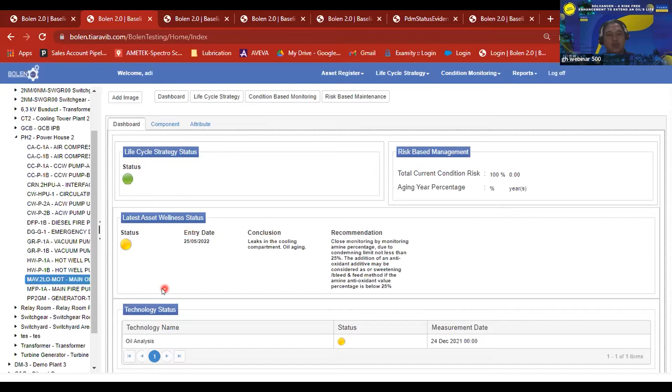Untuk detailnya, di feature Bolen sendiri kita bisa melihat kondisi dari equipment yang kita pilih. Di sini contohnya ada equipmentnya main oil tank. Secara overall ingin mengetahui secara status apakah merah, kuning, hijau, warning atau danger. Kemudian teknologi yang digunakan untuk memonitor aset tersebut. Di sini contohnya adalah oil analysis.

Untuk kemudian dari maintenance strategi, kemudian dari failure mode effect analysis, kita bisa inputkan juga apa-apa yang perlu dilakukan, apakah dari mulai functional failure-nya, kemudian failure effect-nya, dan failure cost-nya, untuk membantu kita menentukan maintenance strategi yang paling tepat.

Selain itu, spesifik terkait dengan equipment-nya, itu juga kita bisa mengetahui secara web base yang mana dengan menunjangnya industri 4.0, yang sifatnya software ini web base, itu bisa mengetahui kondisi dari teknologi status, kemudian measurement point, misalnya di sini ada viscosity, acid number, kemudian RULER maupun MPC atau varnish.

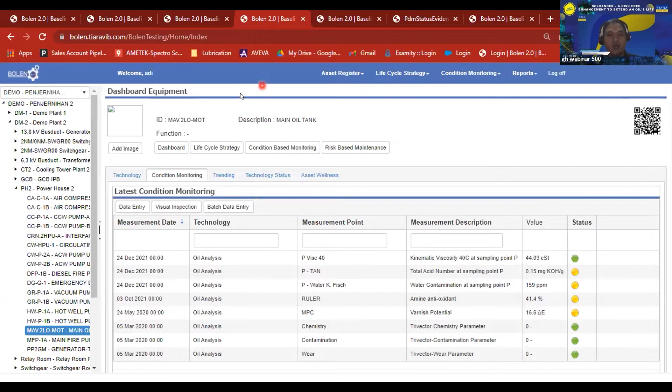Kemudian dari secara overall teknologi status di sini contohnya ini merupakan account demo, statusnya kuning. Kita bisa melihat examination-nya apakah kita menggunakan metode FDCAR, finding, diagnosa, analisis, conclusion, dan recommendation, untuk bisa direview oleh analis apakah rekomendasi yang sudah diberikan oleh teknologi spesialis itu sesuai dengan kondisi yang ada di equipment di masing-masing site atau di pabriknya.

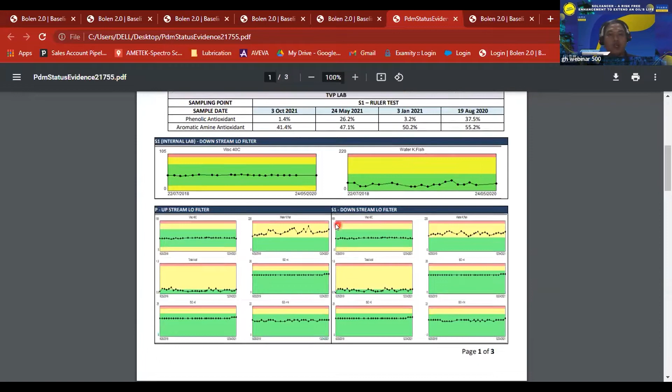Untuk kemudian bisa kita lihat juga untuk evidence secara detail maupun trending dengan cara mengupload kemudian mendownload report yang lebih spesifik untuk nantinya apabila equipment tersebut terdiri dari berbagai macam teknologi, itu bisa ditentukan secara aset wellness-nya statusnya hijau atau kuning atau bahkan merah, untuk kita review kembali statusnya dan finding, diagnosa, analisis, conclusion, dan rekomendasinya secara level aset apakah memang sudah sesuai atau tidak.

Nah, itu sedikit gambaran tentang software Bolen yang Tiara sendiri develop. Mudah-mudahan secara singkat ini bisa meng-capture dan memberi tambahan informasi apakah bisa diterapkan di site atau di pabrik yang Bapak miliki sekarang ini. Baik, dari saya cukup.

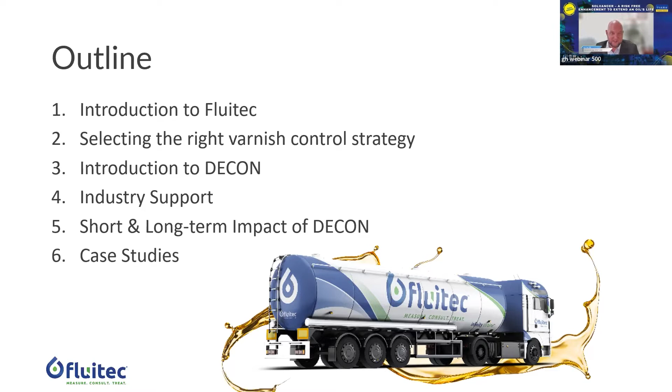First of all, a little explanation about Fluitec.

Our name says it already. We're a company that's in the fluid technology business, and the words below our logo summarize our mission. We have a holistic approach: we like to measure, we like to consult, and we like to treat, to make sure we have a full scope that we can deliver to the customer.

Our corporate seat is based in the Netherlands, that's our HQ. However, our main operations and R&D center are in New Jersey, USA, which is also a major global logistical hub. For Asia, we are in another major logistical hub, Singapore, that's our Asian headquarters and where I am based. From there, we deliver to the region and work locally with agents such as PT Tiara in Indonesia. We also have a local joint venture with some production capacity in Melbourne, Australia, so we're nicely suited to tailor to the market.

So what is it that we do? There are some aspects to this. First, the measuring aspect means our roots are in condition monitoring. We started out as the inventor of the RULER test, our own invention, patented by Fluitec. We also co-developed the MPC, which is one of the major standards today by OEMs and oil suppliers as a varnish potential condition monitoring method. These are our two essential parameters, now recommended by most OEMs as a standard oil analysis slate. So that's the measuring part.

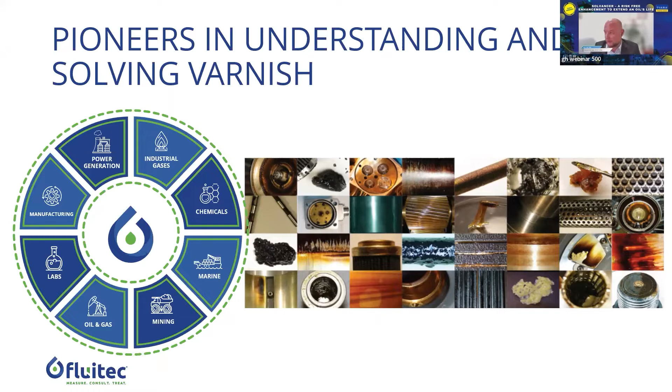We have two main solutions for that. We have an addition, or enhancement, to the oil known as Solvancer, which is the main topic for today. But we also have specialized filtration known as Vita ESP to remove varnish from the oil, because varnish cannot be removed by normal depth media filtration.

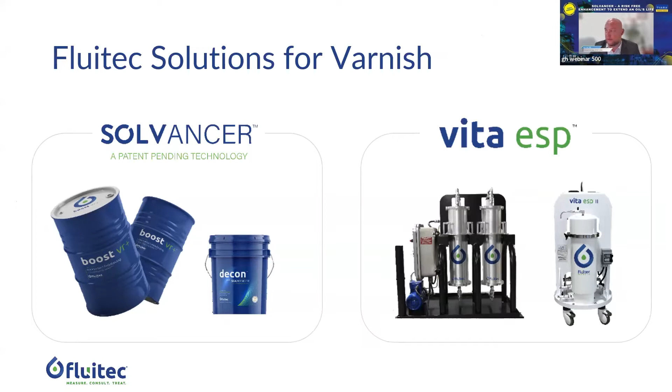Our total product line consists of 4 main products. For us, it starts with knowledge sharing, because we want to educate the market. We want people to know what varnish is, and how they can be more sustainable, more efficient, extend the life of their oil, and so on. So we developed a platform for that called Fluid Learning, where we give webinars such as this and publish it to the market and to interested people. Do take a look at Fluid Learning if you get a chance. Then we have condition monitoring, as briefly discussed, our RULER and MPC. Contamination control stands for the specialized filtration systems we have. And for today, the main topic is the Solvancer product.

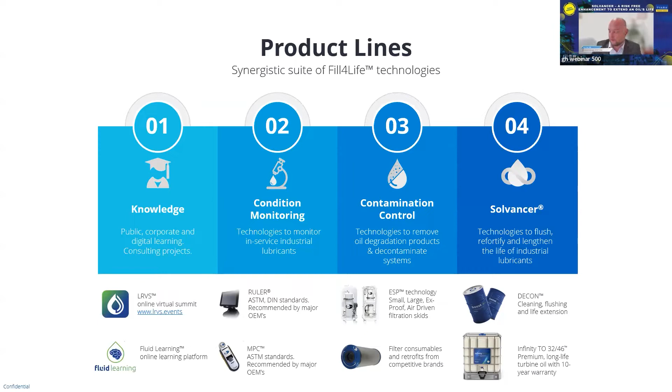Our customers are spread over various industries, consisting of major petrochemical and oil producers, but also OEMs such as Siemens Energy, air separation companies, shipping lines such as Maersk, and of course major oil companies like Shell are our customers as well. So we span across many different industry sectors and geographies.

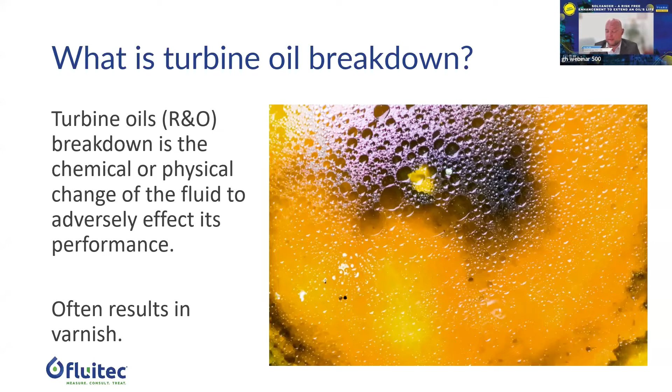So first of all, we need to look at what is oil breakdown, specifically in this case turbine oils, R&O. The breakdown means the chemical or physical change of the fluid, which will inhibit its performance, having a negative impact. This often results in the formation of varnish, which is the sticky layer that forms on metal surfaces.

What do we mean by that exactly? Varnish is basically a deposit that's on the metal, but it's made up of various chemistries. This depends on the operating conditions, the chemistry of the fluid, and contamination that might be happening in the lubricant. But what varnish is, is an oil-derived deposit. It usually comes from within the oil itself, and it's a chemical reaction.

For example, depleted antioxidant additives can start to form varnish. Because it's an oil-derived deposit, it comprises soft and soluble organic compounds. Because they are soft and soluble, they pass through depth media filtration, they pass through your filter membranes, and they are not able to be filtered out by normal filtration. This is the reason why we need specialized methods to combat this issue and help prevent varnish from forming. That's the background of this.

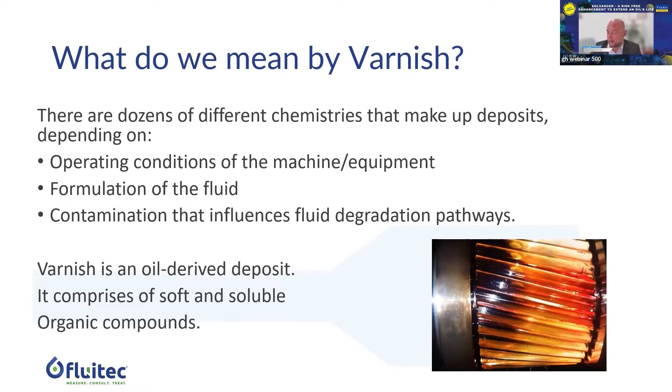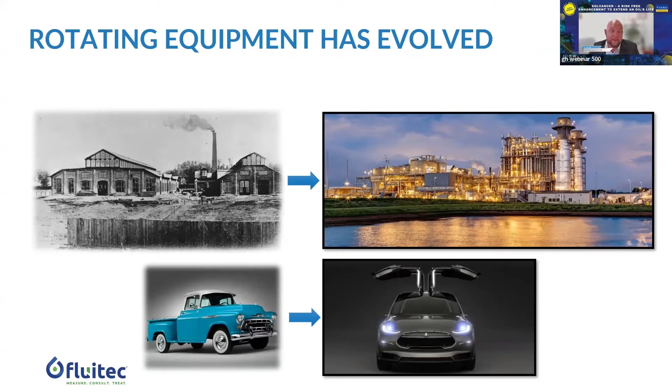Some examples: changing operating conditions in power plants, higher base load, cycling on and off of turbines in some cases when there's a base load issue. That all adds stress onto the oil. Lubricants today may also have multiple purposes, and the formulations of lubricants have changed to cope with this.

New formulations of lubricants have generally resulted in higher performing oils, but also need more care. They need to be monitored and maintained differently, and they need some extra love and care to work properly and to prevent deposit buildup in your system.

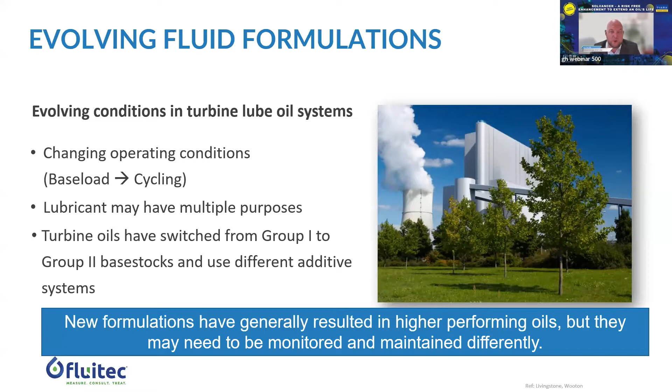If we look at the evolution of lubricants and the way they are being operated, we see that the stress on oils has increased, generally speaking, by 400%. This does not come from us, but from the OEMs—they have concluded this. You can imagine the thermal stresses on the oil are greatly increasing the way it degrades and decomposes. This all adds to the varnish issues we see in the market, reducing the lifetime of the oil and also the equipment.

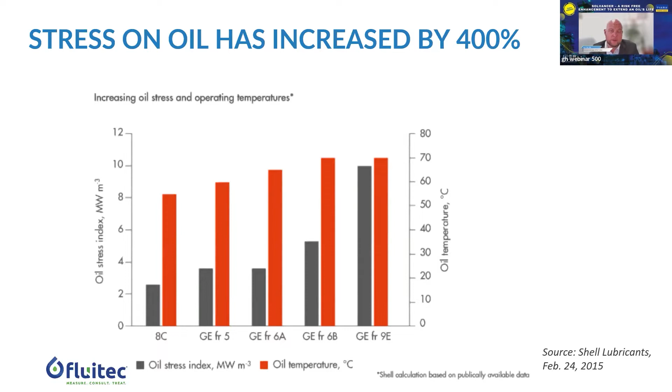So this is something we want to deal with. The signs of trouble first started showing in 2002, when reports of deposits were discussed in user groups, and this evolved into the OEM consensus we have today: that oil-related failures are causing 40% of mechanical issues, and more importantly, these are often preventable. I'll repeat that—oil-related failures today are causing 40% of mechanical issues and could often have been prevented.

So if you have a good oil analysis program, a good condition monitoring program, and you take preventive action, you can potentially prevent 40% of breakdowns that happen. This is an enormous amount of money that potentially can be saved in the industry, and it is an enormous amount of environmental damage that we can potentially prevent from happening.

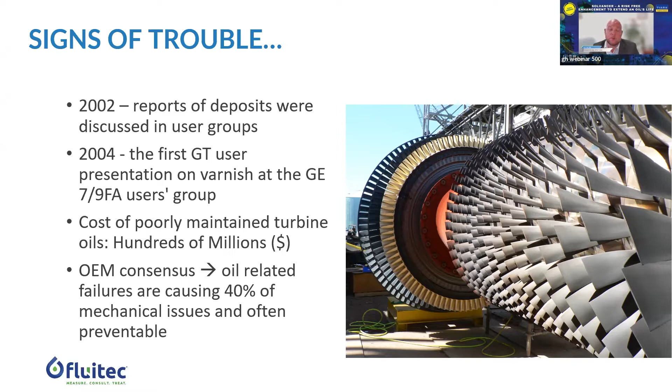Of course, the costs of poorly maintained turbines, compressors, or rotary equipment can go up to the hundreds of millions. And this is not even taking into account the hydraulic systems that we also see having a lot of varnish issues nowadays.

The new challenges we see in turbines are, for example, more sensitive controls, higher thermal stresses, duty cycles have changed completely, and oil formulations have changed and now have multiple functions.

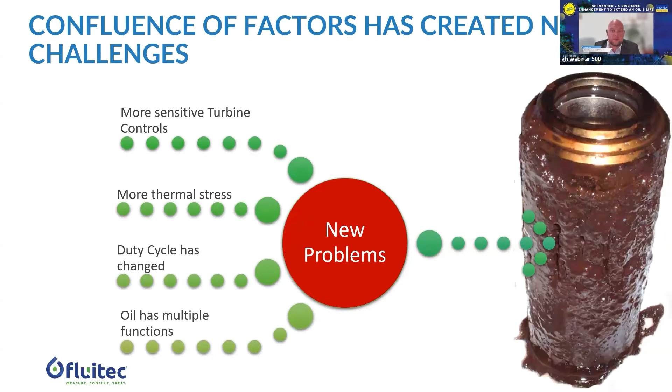This leads to varnish, and varnish can have varied appearances and definitions. It can come as a spongy or sticky substance, even a powder. Sometimes it's burnt, sometimes very gooey, and sometimes it's a layer that you almost cannot remove from the metal. So it comes in many different forms, depending on the chemistry and on what is causing the varnish.

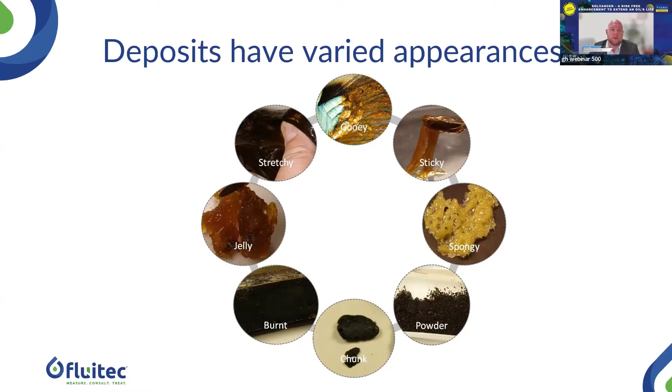It can also come in various colors, as you can see here, which again relates to the chemistry. Very often, when there is a longer period of varnish formation, your oil system internals or oil tank will look something like this, with an orangey brownish layer on the side of the tanks, which is literally a varnish layer - sticky and very tough to remove.

This is actually contributing to contamination in your system and in your oil, and if you do not remove this, it will make the oil degrade faster. So if you put new oil in a contaminated oil tank that has varnish issues, you will degrade your new oil much faster.

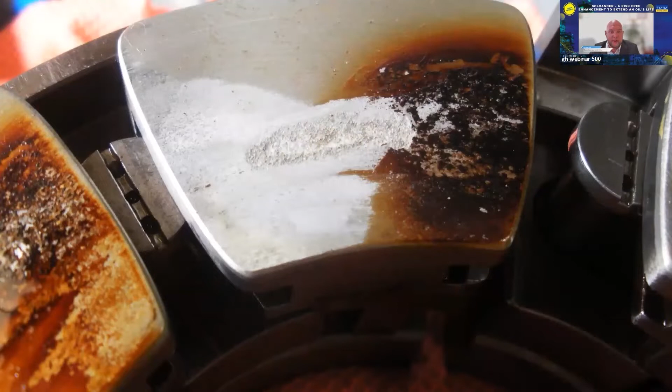When varnish appears on machine internals such as bearing pads, it can create hotspots. It's self-insulating and creates more thermal stress on both the bearing pads and the oil. This creates hotspots in the oil, leading to even faster degradation, which leads to more deposits being formed, and so on. You go into an auto-accelerating cycle, and the problem only gets worse from there. So you would like to act before this happens.

You also see gears coated with varnish in some cases, which of course can be an issue for efficiency and hotspots generated on gears.

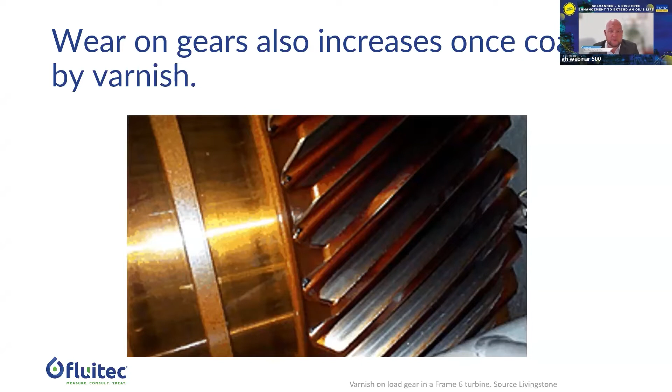Very often we also see heaters and coolers that do not perform well anymore when they are insulated with varnish, because varnish is an insulator. So your heat exchanger will be reduced in efficiency when it has a varnish layer. This can significantly increase plant startup times and decrease the overall efficiency of production, which is becoming a major issue in industries nowadays.

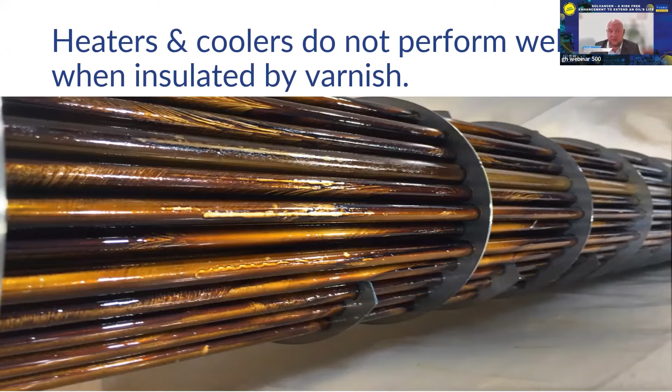One of the biggest problems we see specifically in compressors and hydraulic systems is valve sticking. For example, here you see a servo valve - when the varnish layer becomes too thick and sticky, it actually prevents the valve from moving properly. Then you get either a decrease in efficiency of your machine, or in many cases it will stop working, resulting in a breakdown and a shutdown for maintenance.

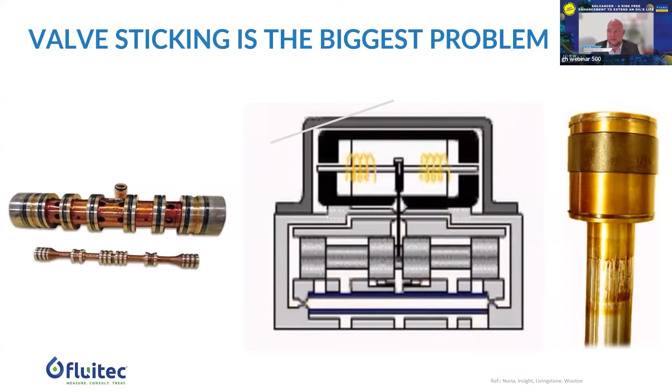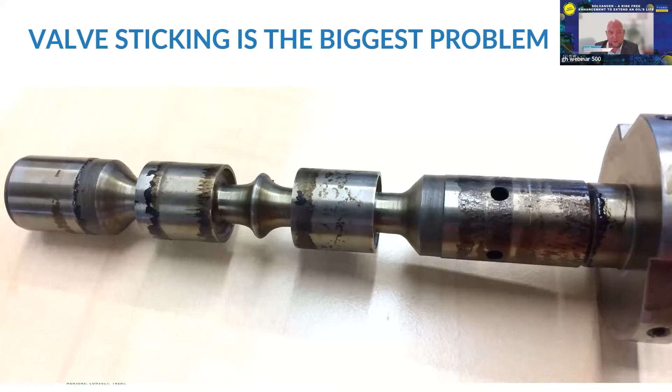Here you can see an example of a varnished servo valve actuator which has broken down. Also on bearing pads and bearing housings, you can see that varnish layers can lead to hotspots, insulating the metal, and creating more varnish on that spot because of that. This increases bearing temperatures because it generates more heat.

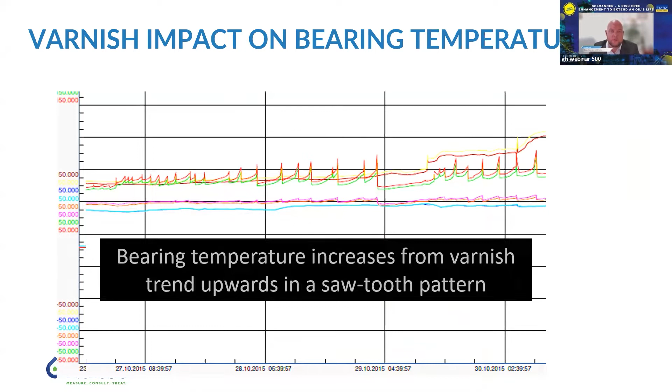This is clearly seen in condition monitoring of the plant, and then a shutdown is needed. Here you can see varnish impacting higher temperature - you will always see a sawtooth pattern as it rises, because it doesn't go up in a straight line with bearing temperatures. This is very typical for a varnish-induced temperature increase, so when you see the sawtooth pattern, it's most likely a varnish issue.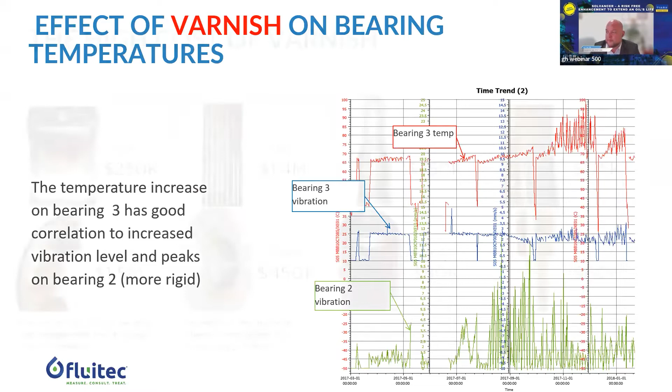Now the cost of all this - if we look at big maintenance overhauls of large equipment, we see what it can cost to change all the varnish-affected materials.

So for example, a bearing pad costs 250K. You can see the bearing pads are even more expensive for thrust bearings and so on. So you can calculate how much money is being left on the table by the industry by letting this happen and just waiting for something to break, or maybe not being aware of a better way of doing things. And this actually is costing a lot of money.

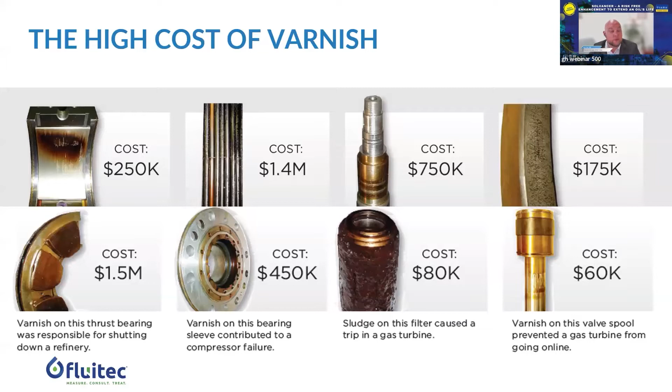Okay, so that is the problem. We have discussed this, and this is a problem that is growing. Now, luckily, we can also come with a solution. Literally, in this case, we have a product. I will focus today mainly on our product called decon, which uses our Solvancer technology.

Solvancer is a patent pending technology, and it is basically a solubility enhancer. By increasing the oil's solubility, you prevent it from forming deposits. So it keeps the varnish compounds in solution in the oil and prevents it from attaching to the metal of your system. By doing this, it actually prevents deposits from being formed. But when the oil passes by existing varnish, it will also absorb this varnish. So it can be used in a preventive and a reactive manner.

So today we focus on decon, but this is the Solvancer ecosystem, as we like to call it. We have a couple of products derived from Solvancer, and the main functions of Solvancer are system decontamination, which is a more economical and sustainable way of cleaning lube systems in between oil changes.

That means that you can dose this product into the system before an oil change, and because of its solubility function, it cleans up the system internals, and then when you change the oil, you do not have to do a chemical flush anymore. So you can completely forget about chemical flushing, which is much more environmentally friendly. It reduces your shutdown time significantly, and it reduces the cost of the shutdown as well. And it's perfectly safe to be kept in the system for longer periods of time. There's no concern on that.

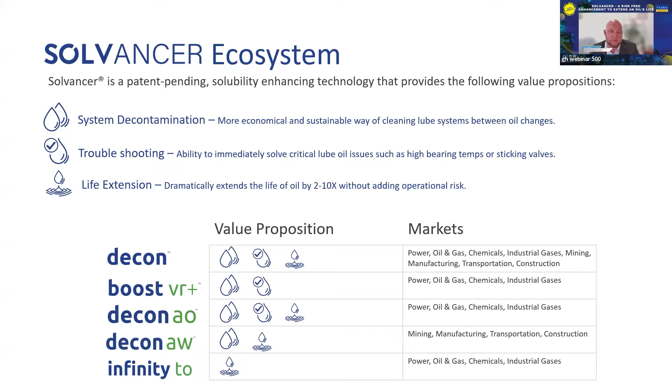So you can see that these are prevalent in many different markets. Let's look a little bit more into decon for a start. So it stands for decontamination and deposit control. It can be used in between fluid changes, to correct mechanical issues, as I just mentioned, or as a preventive measure. If you think your system is going to generate deposits, you put in a little bit of decon to prevent this from happening. And it's perfectly safe, risk-free, and it gives you long-term protection against deposits, sludge, and varnish.

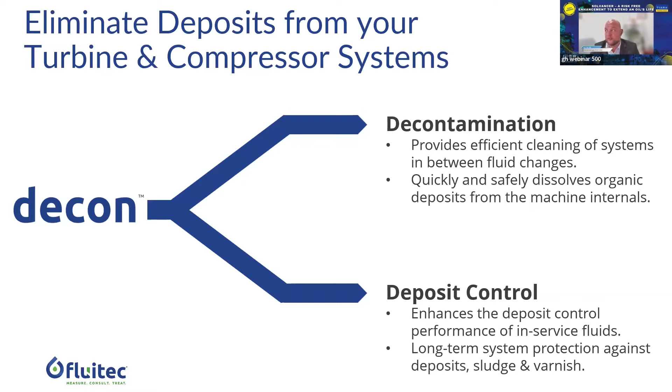So you can leave it in the system throughout the life cycle of your oil or your system. You do not need to worry about changing it. You do not need to worry about leaving decon in your system for a long time. That is because decon is a blend of specialized group 5 chemistries, so there's no concerns on compatibility because it also has superior seal compatibility.

It is very kind to seals. It has excellent oxidation stability and deposit control characteristics. This means mainly that it does not degrade itself when it is in the oil over a longer period of time. It does not form any deposit as compared to other additives, and it has no negative impact on the oil's performance. So all the functions the oil needs to perform, cooling, lubricating, all of that are perfectly kept as per normal when you add it.

So think of, for example, air release, foaming, the emulsibility, viscosity, all these aspects will be within spec. It does not have any active additive components. The product itself, the core product, is a solubility enhancement that does not have reactive chemistry, so it does not react with any other additives in your system. This means it does not create any issues and it does not create any compatibility issues. So it's very safe to use and very efficient.

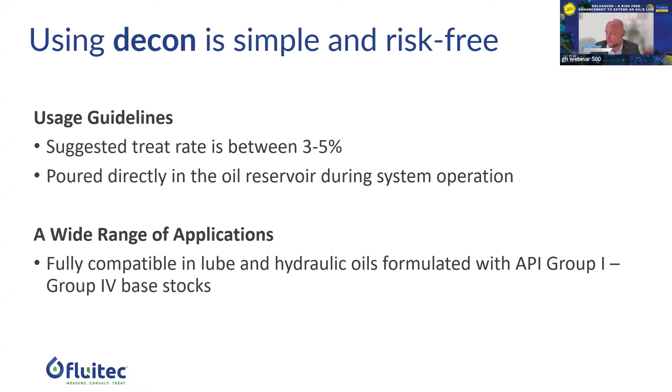And your system will be clean. So when you do an oil change or shutdown, you do not need to do extensive cleaning or chemical flushing. So you reduce the cost significantly.

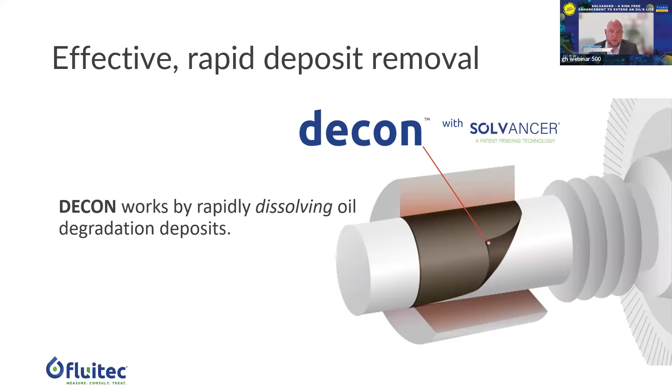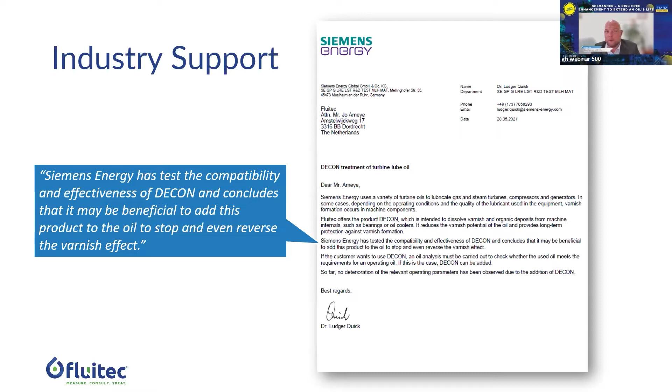The industry is also supporting us on that area. We have here an official recommendation by Siemens, which has endorsed that the compatibility and effectiveness of our product may be beneficial to add to stop or reverse the varnish effect. These kind of statements from a company like Siemens Energy are very significant. They hold a lot of weight. When they put out a letter like this, they have done a lot of validation testing by themselves before they stick their neck out like this. So this is something that we are quite proud of, and is really a good performance validator of our product.

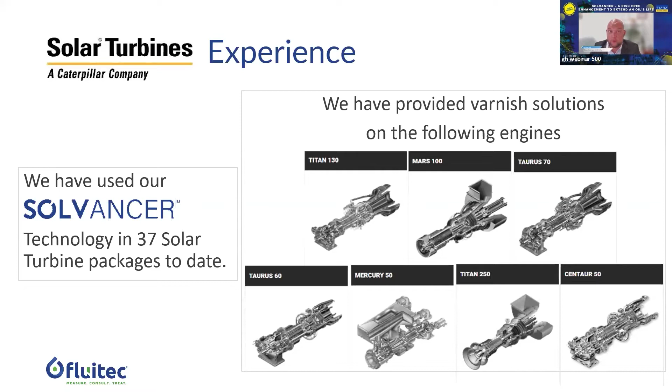Also, together with Solar Turbines, they have used our Solvancer technology in a lot of solar turbine packages to date. I believe it's actually much more now than 37. This slide here still says 37, but I think by now it's probably more than 70. And they have very good results worldwide with this, and they also recommend our product to use in the product.

Also, one of the major oil suppliers, if not the major oil supplier, ExxonMobil, has engaged in a partnership with Fluitec, and they do this in a co-branding arrangement, meaning they buy the core product from us, which is a very similar product, or it is actually as good as our product, and they sell this under their own brand name as Mobil Solvancer. So you can imagine when Mobil does this, it means that they have run a lot of tests. They have done extensive compatibility testing in all the general oils that are available in the market, not just Mobil, but also from their competitors, because they also recommend Mobil Solvancer as Mobil Surf for their customers, and they use it in the same way that we use our Solvancer product. So this is a very good performance endorsement by the major oil supplier.

The main benefit of DECON is that it has an immediate impact on varnish potential and MPC values. You can see that the MPC will go down, usually within 72 hours to 1 week after dosing in the DECON, you will see significant drops in MPC, and this, of course, is very good for your varnish potential.

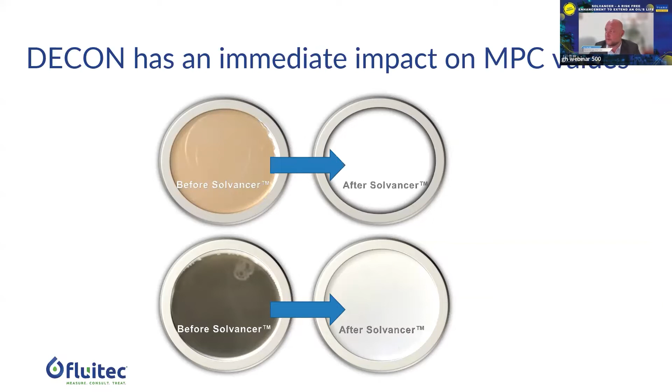Here you can see a test also demonstrating this, where we have a new oil that has been stressed in the TOPP test, the turbine oil performance prediction. This is an accelerated oxidation test. We use an accelerator coil in an oil bath to increase oxidation, so 6 weeks stands here roughly for a lifetime of 6 years. You'll see that the antioxidants go down a bit, but especially the MPC goes to a critical level at 64.

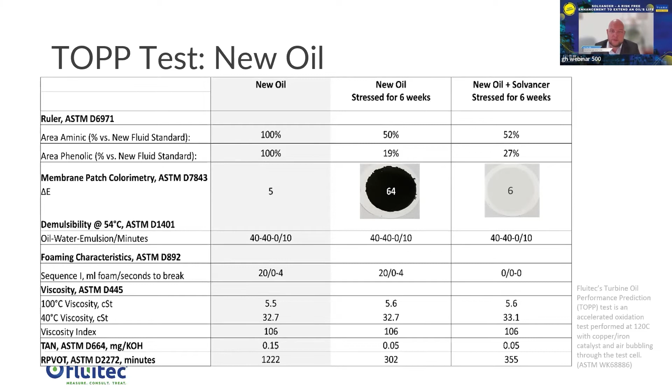When we do the same test on the oil but with Solvancer, we see that the MPC doesn't go above 6, so a significant improvement in varnish potential. Here you can see the visual results of this: same oil without Solvancer on the left, same oil with Solvancer on the right. Significant improvements on MPC and the visual appearance of the oil.

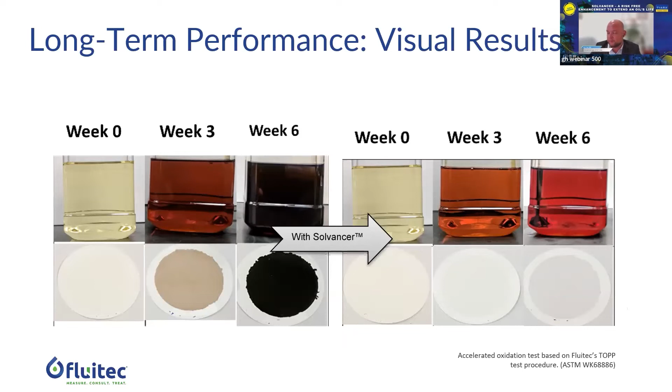What is also a key benefit of DECON and Solvancer in general is that it does not form deposits when it degrades. So even after antioxidants have been consumed, Solvancer still works to prevent the creation of deposits. Normally, what will happen when antioxidants are depleted is you lose the protection layer of your oil. This means you get a lot of deposits being formed, an increase in acid number, and so on. This will all accelerate the amount of deposit and varnish being formed.

But even in those circumstances, DECON provides an extra layer of protection when the antioxidants deplete, to prevent the build-up of deposits. So it offers additional protection even when the other aspects of the oil have failed.

Here we can see the TOPP test on an in-service oil, where also visually and on the MPC test, you can see significant improvements when we add only 3% of DECON.

So this would be related to a preventive way of using DECON, where you think an oil is going to perform really badly in varnish potential. You add in a little bit of DECON, and you can see here the effects that this has on the oil - extremely low MPC values compared to the neat oil. Especially if you look at the beaker and accelerator coil, which was completely varnished in the original test and has no deposits in the test where we use 3% of DECON.

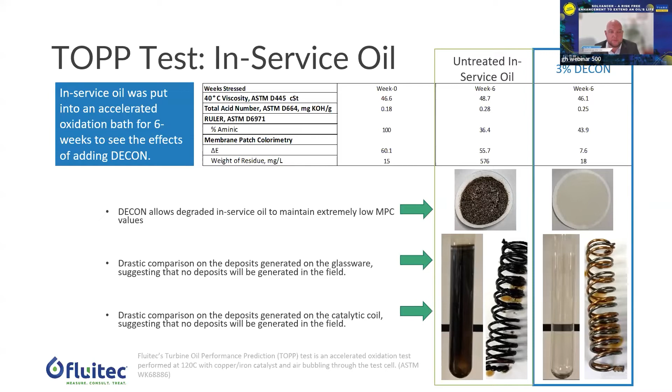We can also compare test results with real-world field experience. You can see on the left slide here the MPC results of TOPP testing. As mentioned before, after 18 weeks there were no deposits being formed, so very good results. But we also see on the right side the real-world situation.

This is just one of many cases we have, in an N2 feed compressor where the neat oil was giving almost critical MPC levels after 3 years. The same oil with 5% of DECON had almost no MPC increase after the same period in the same compressor after 3 years. So also in the field, we see very good results with DECON.

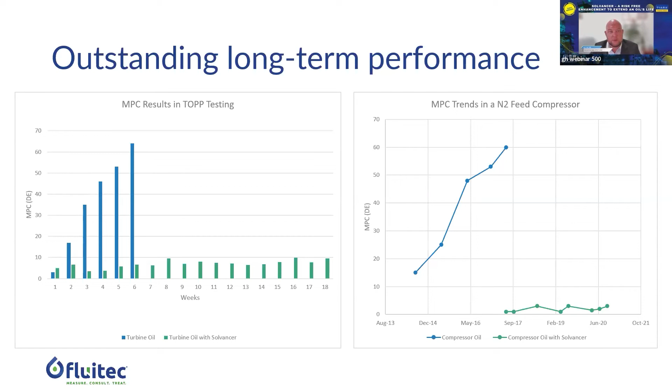All right, so that summarizes a bit on our DECON product. I would also like to talk a bit today on DECON AW, a hydraulic product with Solvancer technology as a base for its performance. This product to us is a paradigm shift in hydraulic fluid management, because it completely changes the way that operators can deal with their hydraulic fluids.

This is because we see a lot of failures nowadays in hydraulic fluids. It's a bit similar to the turbine oils, but more complex because the formulations are more complex as well. We see increased thermal stress because of higher efficiency requirements and smaller oil sumps, and of course environmental concerns mean that everything needs to be smaller but hotter, and this has an effect on the oil.

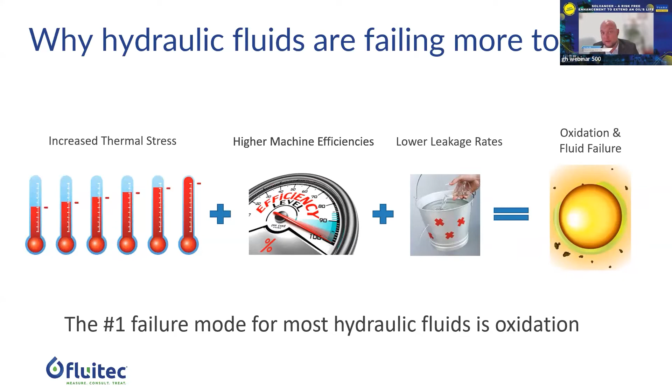This also means that lower leakage rates are allowed because of environmental concerns. All of this means you have extreme oxidative and thermal stress on the oil, meaning a lot of heat, and this always increases oxidation. That's why we see the number one failure mode for most hydraulics is oxidation at this moment, directly or indirectly. So we want to combat this because the cost of fluid failure in manufacturing is enormous.

And of course, this is also very bad for the environment. A lot of oil is being prematurely discarded, and a lot of components are being replaced prematurely. So these are the impacts of varnish in the manufacturing world.

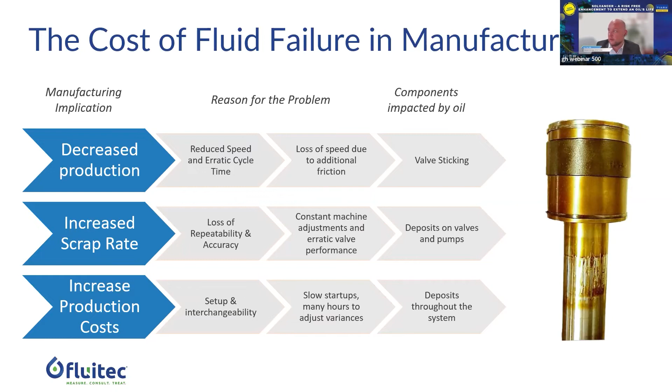So what can we see that is really increasing the cost? Of course, increased valve pump and repair cost, overall shorter machine life, and overall shorter oil life. This is increasing production costs around the world, and this can be due to varnish coating, and also, as discussed before, varnish coating on heat exchangers can decrease the efficiency.

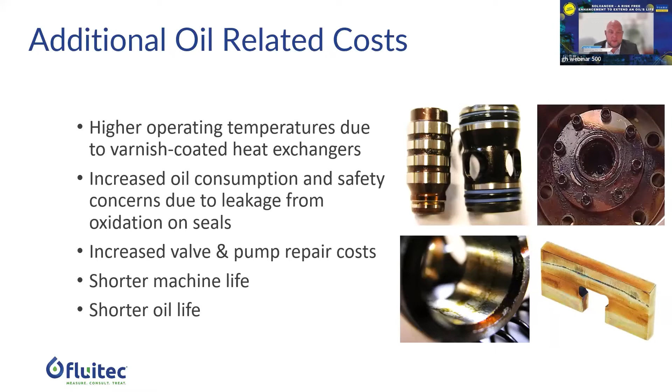So what can we do to prevent this? Well, we can provide DECON AW, for example. Also, normal DECON will work perfectly in these systems to remove the varnish. But when you add DECON-AW, you not only remove the varnish and decontaminate the system, but you also upgrade the antioxidant system and restore the anti-wear capacity of the oil. So you increase the amount of antioxidants and anti-wear additives in the oil.

So you basically get a decontamination and varnish removal and a boost of the additive system, which provides enormous life extension to the oil. So the oil will last much longer, but it will also run cleaner. It will run more efficiently. You have lower leakage rates, less breakdown, less replacement of parts.

And you can see this clearly when it comes to increasing manufacturing profitability. By fortifying this oil, by extending its life, but mainly also by making your equipment run better and more smoothly, you can lower the hydraulic cost significantly.

So you significantly increase the oil life. You will have 60% savings over an oil change by increasing, for example, RPVOT value by 3-fold and reducing scar diameter in the 4-ball wear test significantly as well, by as much as 50%. We've also seen that it helps to control foaming, which also increases efficiency and reduces leakage rates and so on.

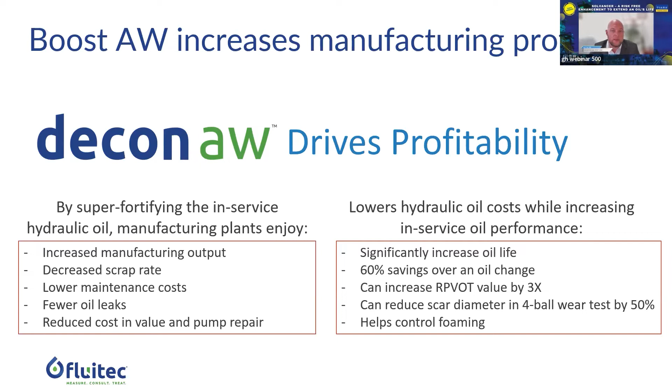So you get many benefits on your manufacturing side here, which will increase profitability and increase sustainability of your production. And again, this can all be done in service, through adding DECON-AW into the system while the plant is operating, or in service.

So we also have for today, as the last topic, in the interest of time, a few case studies that we can share with you from the field to show how it works in real-world conditions. So we have some experience with pipelines from a major oil supplier as well. In this case, the varnish removal helped to increase the efficiency here.

But major applications for us are compressors in a refinery, for example. So here you have a recycle gas compressor. What happened here was they were experiencing high bearing temperatures in a steam-driven compressor. The MPC in this case was actually elevated, but not so critical yet, and the antioxidants were still at an acceptable level, relatively high at 69% according to the RULER testing.

However, there were some mechanical issues that were being experienced: high bearing temperatures, and an observable impact on the shaft rotor position, meaning the vibration of the shaft, which correlated with the temperature spikes. And again, you see the sawtooth pattern. This means that it's likely there is varnish.

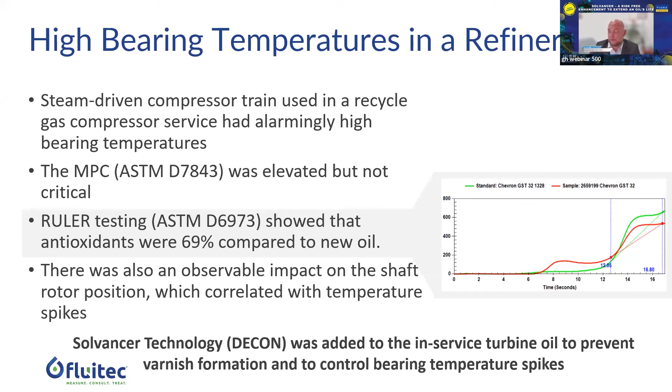So in this case, the customer decided, after our advice, they wanted to add DECON into the system to see if this would have a positive effect. Even though the MPC was not critical, it was still elevated, so it went back to 1 after 1 day, from 22 to 1, and stabilized at around 4.

But more drastically, we could see after we added DECON, we have an immediate reduction in bearing temperature. So the overall average temperature was reduced significantly, and we prevented the sawtooth pattern from occurring, where you have temperature spikes in your system every time there is a varnish layer forming. In this case, over a 2-year period, for 18 months, the bearing temperatures have remained very stable and the MPC has remained low by adding a bit of DECON into the oil.

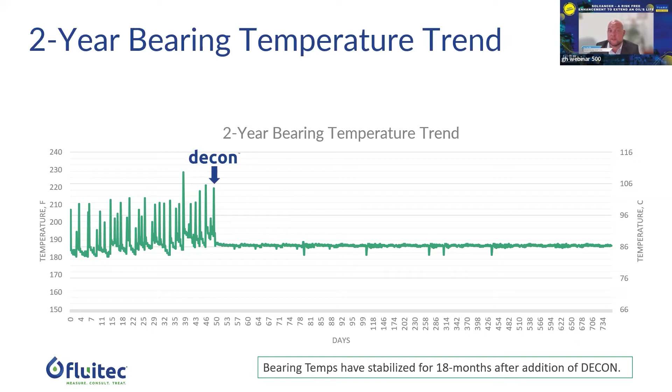So, very good results, and we have seen many cases like this in refineries, also with ExxonMobil. The refinery does not have to bring down a unit because of high bearing temperatures, because that was normally in the past the only solution they had: shut down, break everything open, clean it, and go back to normal. But now they did not have to do that, so they could prevent enormous costs, of course.

Also, DECON has provided excellent deposit control, preventing formation of varnish, and this continues throughout the life cycle of the oil, so it will prevent deposits from building up anywhere in the system.

And we can confirm this, of course, with the MPC tests that have shown a lower varnish potential of the fluid, actually to very low levels, to what you would expect from a new oil. So overall, very good results on this unit for this plant. And as a user, you have multiple benefits, of course, to this situation.

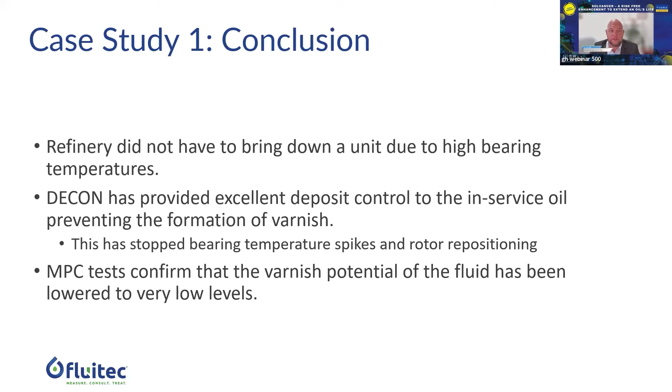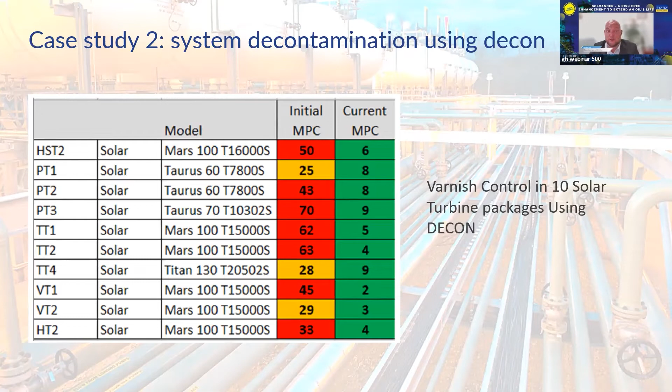With solar turbines, we have many good experiences, but this is just one snapshot of one customer that was using 10 solar turbine packages in the US. They were experiencing high MPC levels, and in order to prevent this from becoming an issue, discussed with us and added a certain percentage of decon into all these solar turbine packages. And as you can see, the MPC all returned to normal, to below 10, in some cases even below 5. So the oil is running clean, and this means that your system is running clean as well, and therefore increases your efficiency and especially your reliability as well.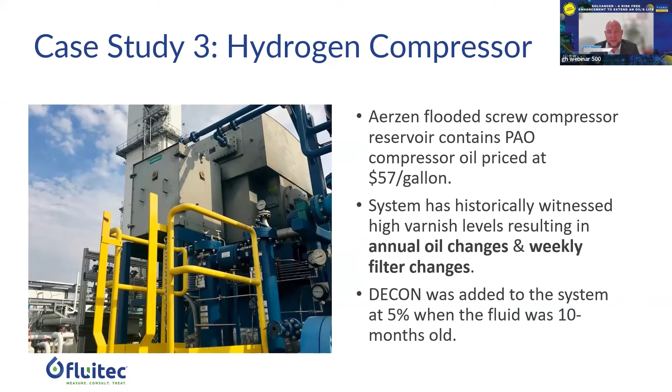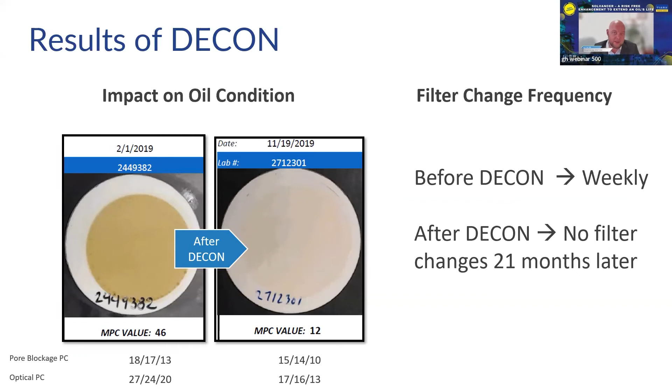And what we see was an immediate effect here on the MPC. And this had immediate effect on their filter changes. So the filter changes went from every week to 21 months and still counting. So the impact on the oil conditions here was significant, and you can imagine how much money they saved alone on filters. Well, actually, we also calculated this. So the filter savings was 5.5K during the period of 21 months that we measured at this customer.

But the oil savings, being a very expensive PAO, was even more significant. So just for this minor correction, adding in a little bit of decon, the total savings amounted to $51,000. And this is very common that we see, that with this kind of correction, by adding decon, we can achieve massive savings in terms of maintenance and operations at a plant. And of course, we have not counted here that there has been no maintenance, no breakdowns, or no operational issues which they previously had due to varnish. So if you count those, the savings are even much higher than this.

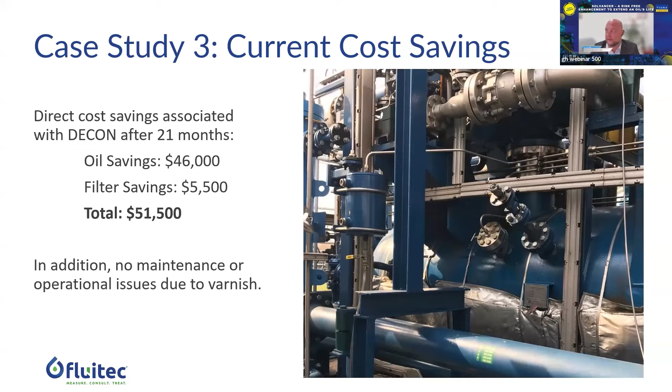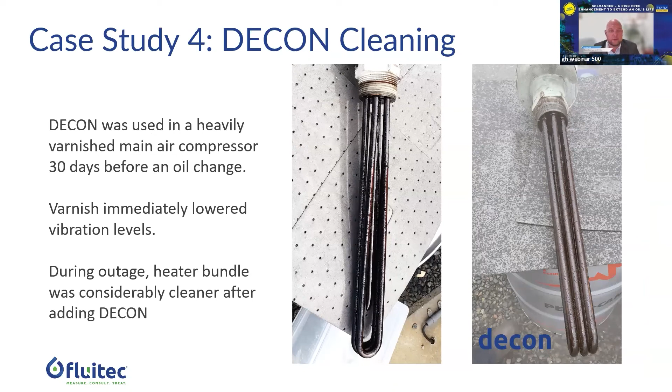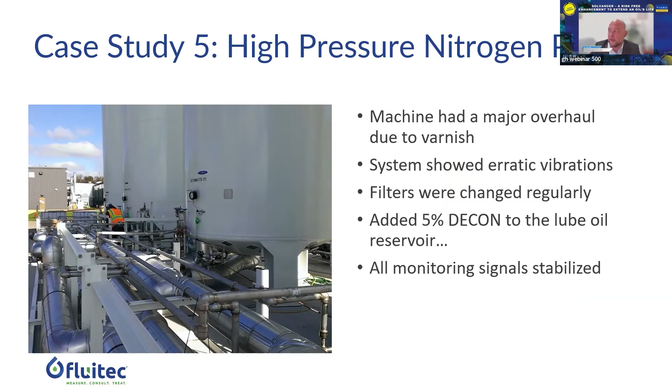In the nitrogen plant here, for case study number 5, the machine had a major overhaul due to varnish. In this case, we added 5% of decon, and the monitoring signals were stabilized. As you can see here on the top of your screen, you can see oil temperatures in the pink graph being erratic. You can see back pressures of filters being erratic as well due to filter plugging. Every red arrow on the orange graph is showing back pressure decrease or increase due to filter plugging. And this led to complete machine overhaul.

Now, after adding decon, you can see the difference immediately. Everything changed and stabilized. Lube oil back pressures were returned back to normal, and vibration decreased, and so on. And of course, no more filter changes as regular as before. So decon helped to stabilize this whole plant operation. Again, significant benefits from a relatively minor correction.

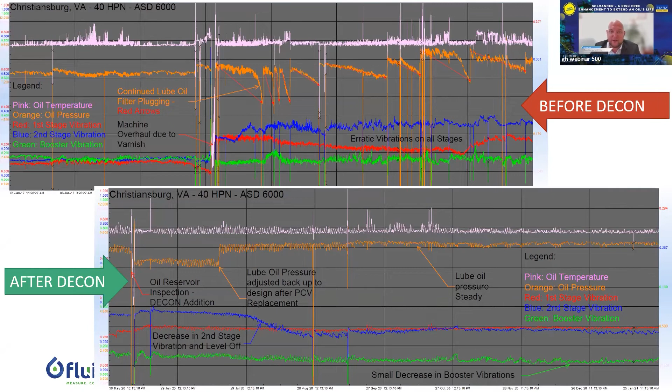So the final case study that I have for today is here in the Gulf of Mexico, where we had a Solar Turbine Taurus 60. This customer was concerned because it's a highly salinic environment, a lot of moisture in the air, and high temperature. So these are all aspects which are very bad for the oil. They all increase oxidation, they all increase degradation.

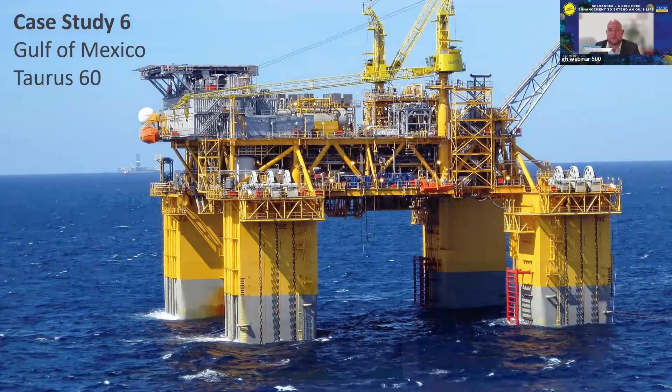So this customer thought, let's just be ahead of the curve - very smart thinking - and let's add 5% of decon to this lubricant to provide long-term protection from varnish, so that I can operate here in this challenging environment carefree, and I can sleep soundly at night.

That's what they did, and we had some very good results. MPC went from 28 to below 1, so that you cannot even achieve that with a new oil. And up to date, they are running their equipment without any breakdowns, which is an enormous improvement to what they had before when they had regular issues with their turbine.

And for an offshore company that always has a challenge to fly in spares on time, and that has significant cost when something breaks down, this is an enormous benefit and of enormous value to them. And we have a lot more of these cases in the offshore world as well.

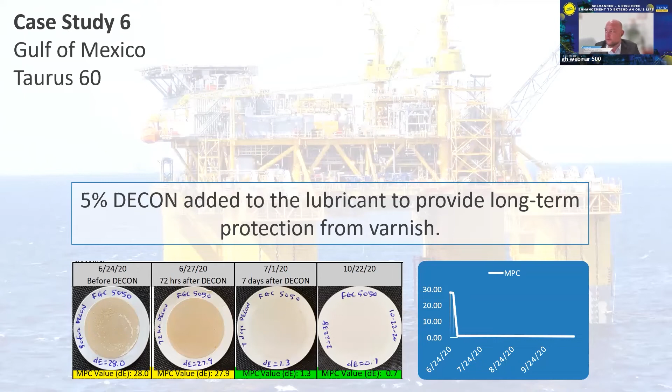So DECON, in summary, it's a cost-effective and highly scalable solution to varnish, meaning it can be used in many different applications, from a small plastic injection molding machine to a 60,000 liter power generating turbine. So wide range of scalability and application.

It will lower MPC values by dissolving the deposits from the internals of your system, and by keeping varnish solubilized, thus cleaning your system. In the long term, it will protect from forming deposits and varnish, and will add an extra layer of protection if the additives of your oil fail. And it will provide protection for as long as the oil is in service.

No concerns on compatibility. It's completely risk-free, and will make you sleep soundly at night.

So that's the end of my presentation for today. I hope the information was useful. We started a bit late, so we're still a little bit within the time frame. I'm curious to hear if there are any questions, and we'll be happy to answer that.

Okay, Lars, thank you very much for your great presentation on this session. So there are a lot of questions in the Q&A chat box. Some questions I already answered, but I can combine some questions also, since several participants have quite similar questions. During this Q&A, I will tell you the question one by one, so you can answer it one by one too. So first question: this customer has an air compressor where the lubricant changed and became gel. He's asking what is the possibility for that cause, because the type of compressor uses air that combines directly with the oil.

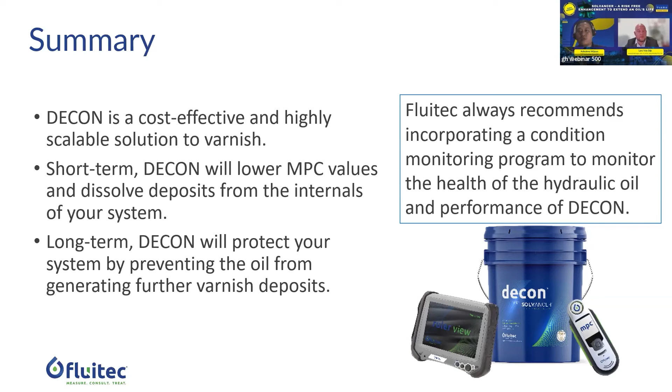Thanks, so we can continue to the third question. This combines several questions. So when we use Solvancer or DECON, first where will the varnish come out and carry over, and then what's the effect of DECON on oil properties, like water content, or if there's a water content issue, will DECON be effective? Let's go one by one.

First of all, the basic function of DECON is to solubilize the varnish. You can compare this with dissolving sugar in your tea - it completely disappears and isn't doing any damage by creating deposits. DECON does something similar: it completely dissolves the varnish compounds, and when they're in solution, they are harmless.

They do not pose a threat to your filters or to your machine internals, and DECON will keep them in solution for as long as the oil is in service. That's what we've shown with accelerated testing for 18 weeks, simulating an 18-year procedure. We have customers who've used the product for years, and it will keep the varnish in solution so it won't form any harm. That's how DECON works - that's why it's risk-free, and that's why it's supported by ExxonMobil, for example.

On the question of water content, if you have water content, there's not much DECON will do to help. It adds protection by preventing deposits from degradation caused by reaction with water, so you'll have some protection, but it won't solve the core issue. If you have a water issue, you need to look at water ingression - where it's coming from - solve that, and look at water removal, vacuum dehydration, and other technologies available in the market to do water removal.